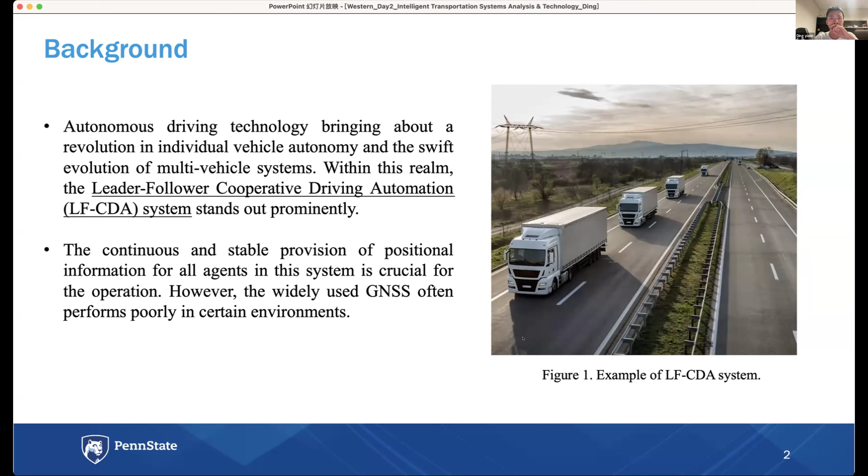I will use the ATMA system to explain what the Leader-Follower cooperative driving automation system is. The ATMA system is used to ensure a safer environment for DOT workers when they do essential tasks like striping. You have two trucks, and the leader truck will handle these tasks, while the follower truck will act as a safe buffer in case an accident happens.

So if you use this system to replace DOT workers, maybe you will decrease accidents happening on the highway or places like this. You get two trucks: the follower truck just follows the leader truck, and the leader truck does these tasks. So that's the ATMA system. In this research, I consider this as a cooperative localization problem within the leader-follower cooperative driving system.

Now I will quickly talk about the literature review. In the current literature, articles on cooperative localization can generally be categorized into two types. One is agent-to-infrastructure based methods. These methods use relative position information exchange between vehicles and a base station along the road to ensure constant communication and data exchange. Basically, you get a base station, and the communication process between the base station and your agent provides each agent within the multi-vehicle system location information.

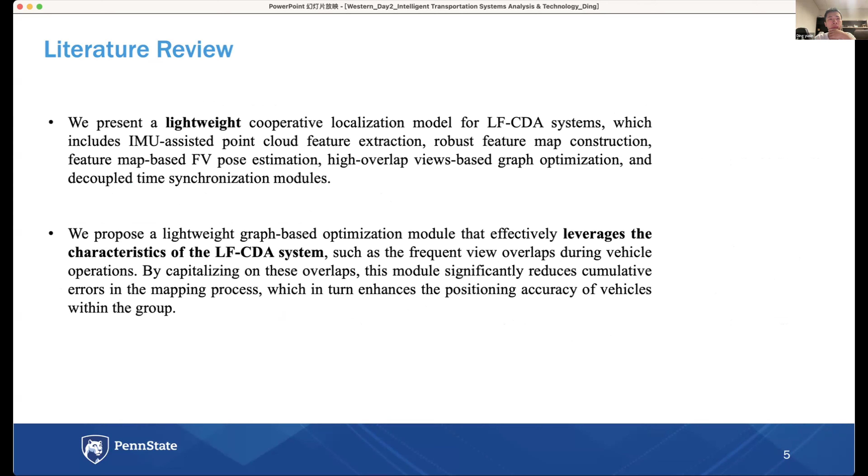So now I will come to the methodology part. We will use the agent-to-agent methods framework to build our own model. And to facilitate the description of each module in this study, we focus just on two vehicles.

So here we just use two vehicles, one leader vehicle and one follower vehicle, to demonstrate our proposed model. Each vehicle will be equipped with LiDAR sensors and IMU sensors, and we will use this sensor data to localize the leader and follower vehicles within the leader-follower system.

Firstly, I will talk about the feature extraction module. This module is used to decrease the size of the LiDAR points cloud, because the LiDAR points cloud is very big, and this will decrease the running speed of our system.

So firstly, I will remove the distortion of the LiDAR points, because when your vehicle keeps running, the LiDAR will have distortion. For example, the LiDAR sends points out at this place, and the vehicle will not stop. Then when you get back these points, the vehicle has gone to another place, which means that the shape of the LiDAR points is not right.

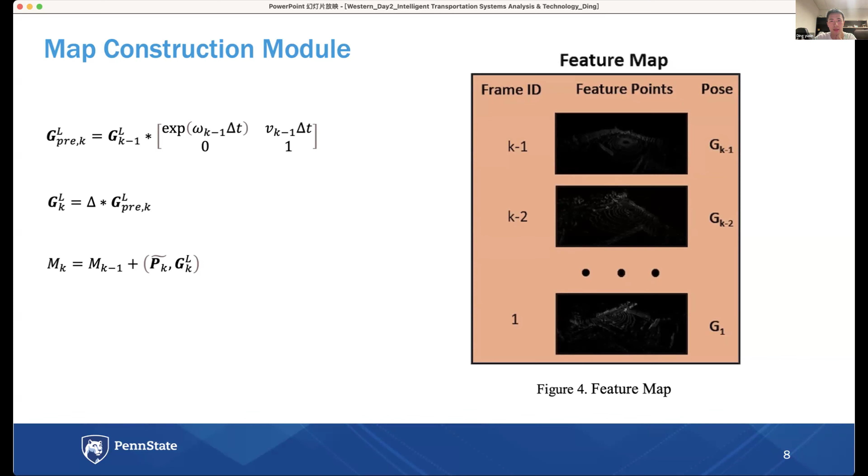And then I will go to the follower vehicle pose estimation, because I've just estimated the leader vehicle's pose, and now I want to estimate the follower vehicle's prior pose. So after using the KISS algorithm, I get the leader vehicle's pose, and then I want to use the NDT algorithm to get the follower vehicle's pose.

While this algorithm requires a lot of computational resources, to reduce this requirement, I use an initial guess for this algorithm.

So we use IMU to estimate the rotation and translation of the follower vehicle. If you want to know how the follower vehicle moves, you have to know the rotation and the translation.

For the rotation, I already get the rotation because when I removed the distortion, I already got the rotation. The R matrix is the rotation of the follower vehicle. And for the translation, I just use the translation of the previous frame as the translation for this frame.

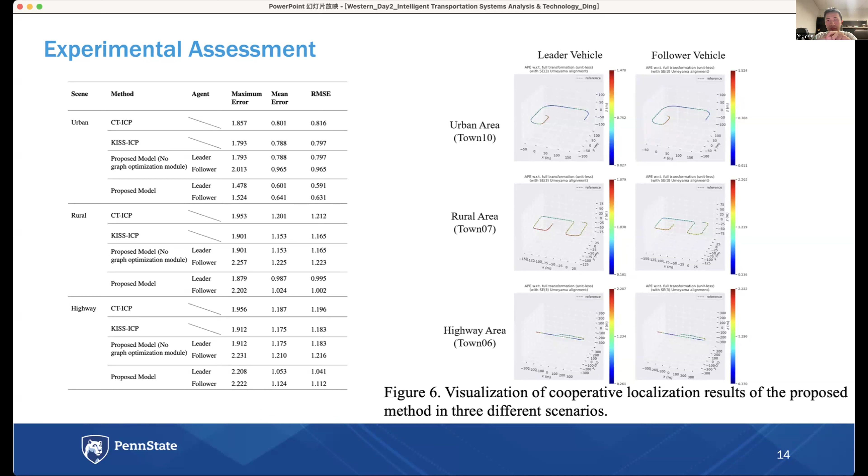The experiments also demonstrated that our algorithm meets the real-time requirements. The whole process, the whole framework of our proposed model, just needs 192 milliseconds, which is less than the frequency of our LiDAR.

So finally, in this research we introduced a cooperative localization model for the Leader-Follower CDA system, designed to provide stable localization in GPS compromised environments. The results show that our algorithm not only reduces the accumulative error but also satisfies the real-time requirements of the system. Thank you, that's all.

Yeah. All right, thank you, Yuxin. Let's see if you have any questions. Well, okay, yeah.

So this, well, I mean, now it looks to me like it's a model. Yeah, it's a model. Have you tested this in any physical environment?

No, not right now, because we need two vehicles, right? A leader vehicle and a follower vehicle. So it's hard for us to find this. We just have one vehicle, so yeah.

Okay, yeah. So yeah, because I think now we have somebody, Lee, you can just turn on your mic to ask.

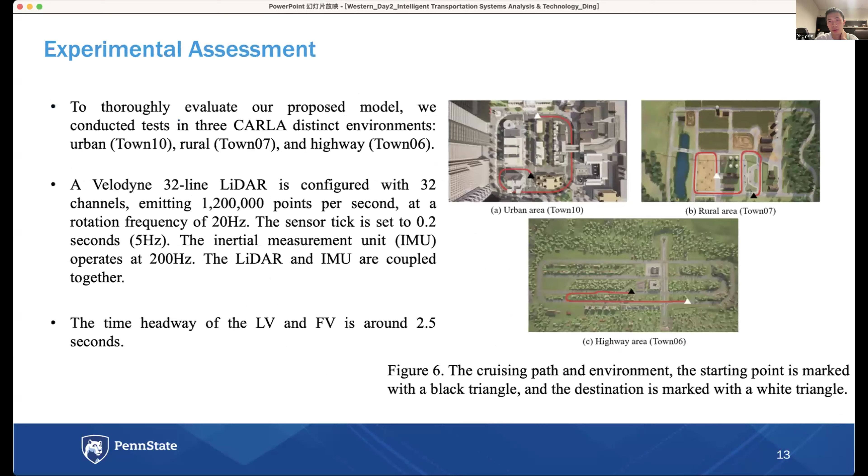So you ask what types of failures may happen, right? Yeah, so I guess building this relationship between a leader and a follower vehicle and building that around your model, in what ways might your model fail, or what kind of extra safety considerations would a company have to think about if they switch to using your approach? And we have a potential failure here.

So we did this research mainly focused on the ATMA system. We want to use our proposed model firstly in the ATMA system. So the thing here is, you can see, if you meet say a traffic light, right? If the leader vehicle just crosses the traffic light while the follower vehicle just meets the red light and stops here, then you will get some problem here, right?

And now, if the travel distance, if the distance between these two vehicles is too long, then you will lose your communication between these two things, and the follower vehicle will just not know where it should go. So following distance would become really critical. Thank you, yeah, thank you.

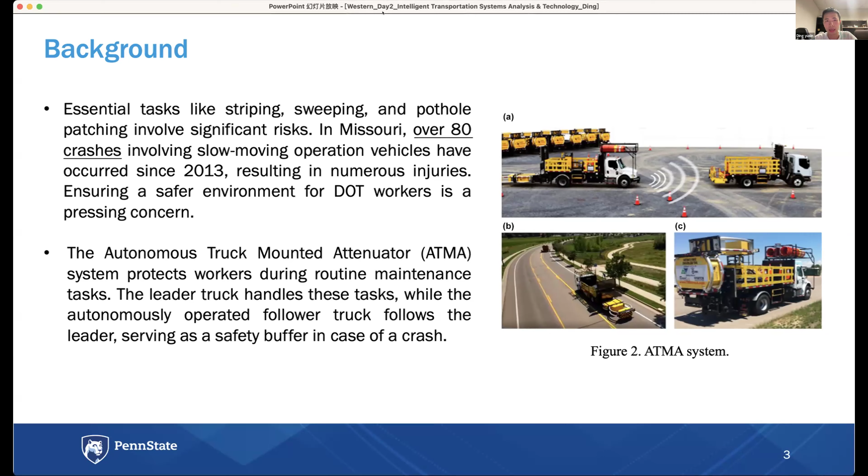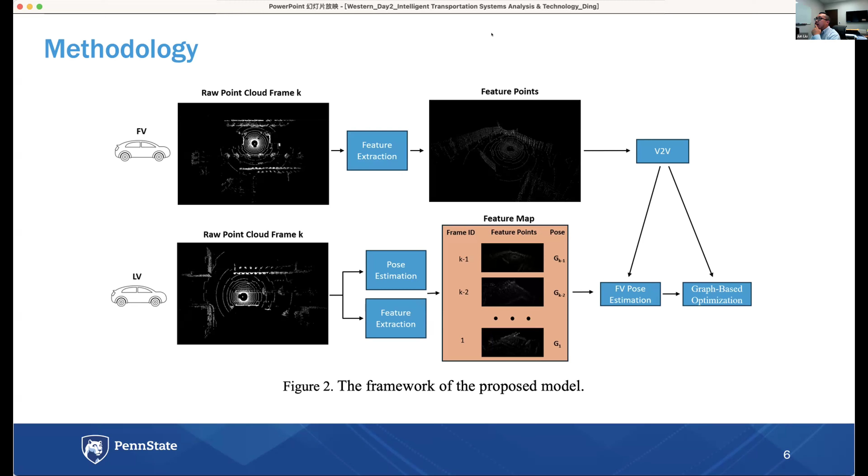So as I just mentioned, for this paper I just used two vehicles to describe our model. But actually, if you want to use this proposed model with one leader vehicle and multi-follower vehicles, that's okay too. Here I just used one follower vehicle. Thank you, Yixin, that is great. Now let's move on to our next talk.

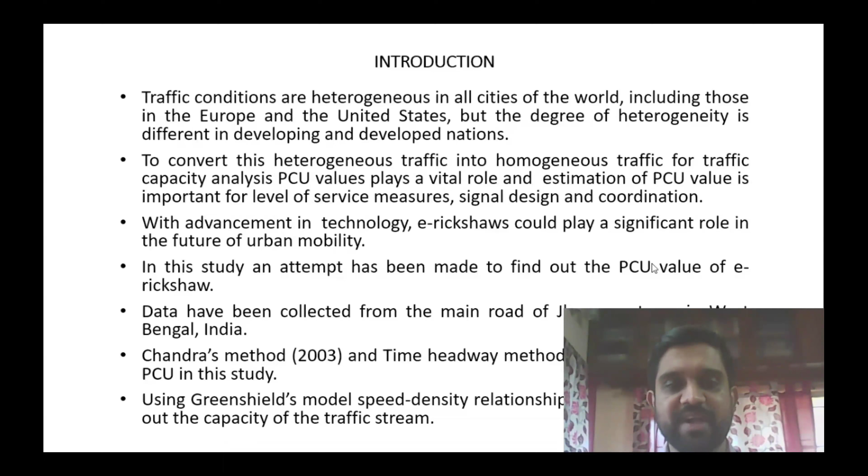There are many methods to determine the PCU value, but here we have used Chandra's method and the time headway method. Greenshield's model has been used to find out the capacity.

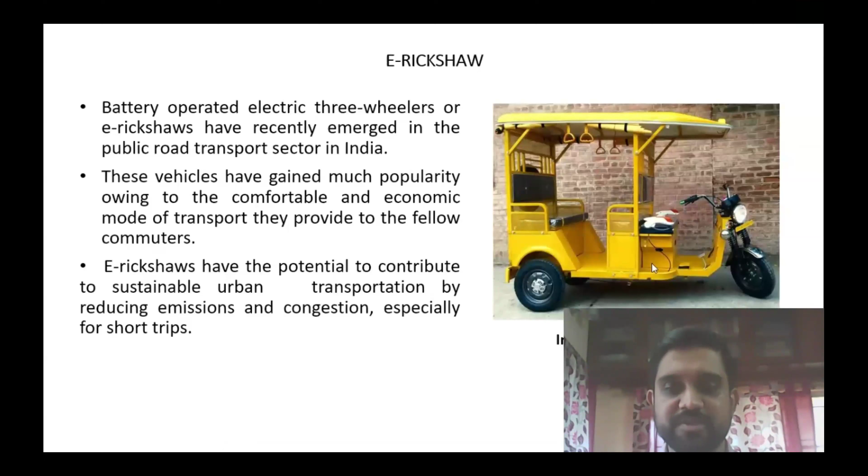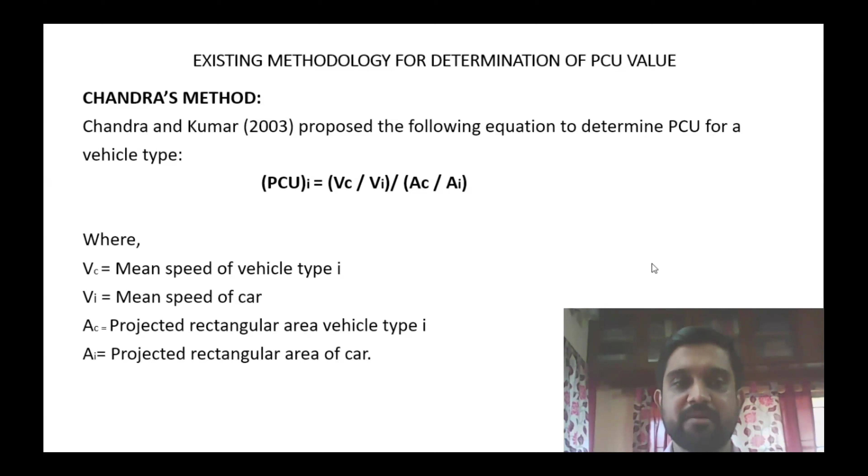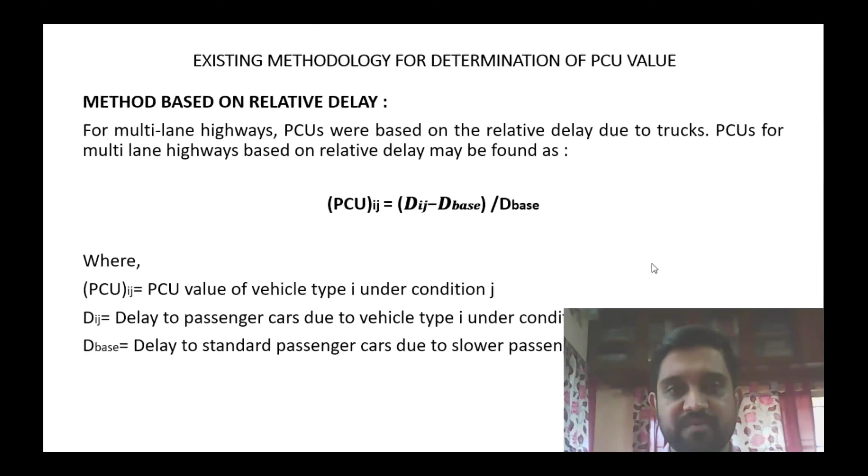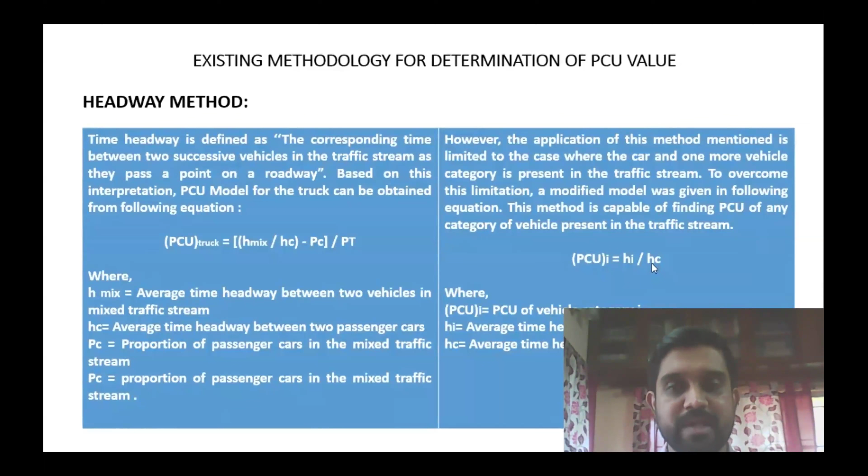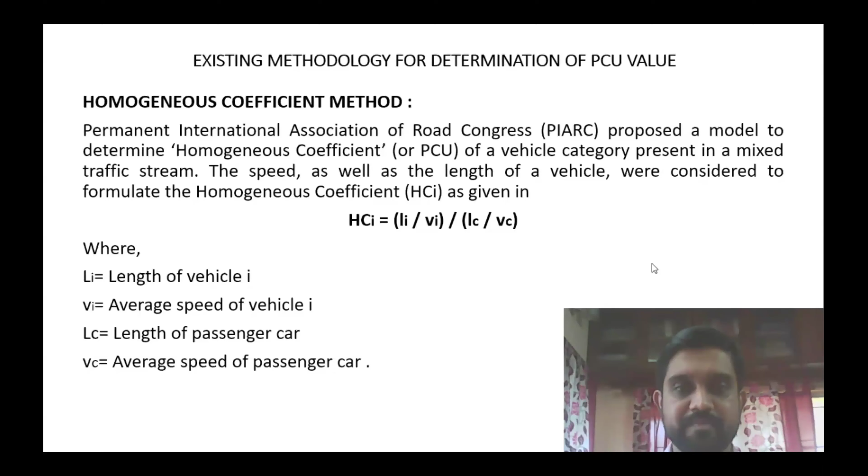The basic considerations while selecting this site were that it should be free from the effect of intersection, bus stop, parked vehicles, curvature, gradient, and any other friction. The section has wide proportions of different categories of vehicles, meaning it has a wide and mixed category of vehicles, and E-Rickshaws have just started operating in the past few years.

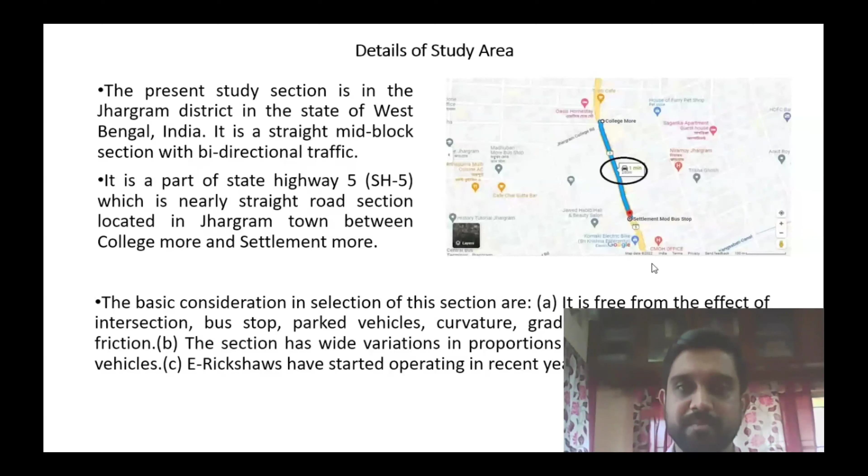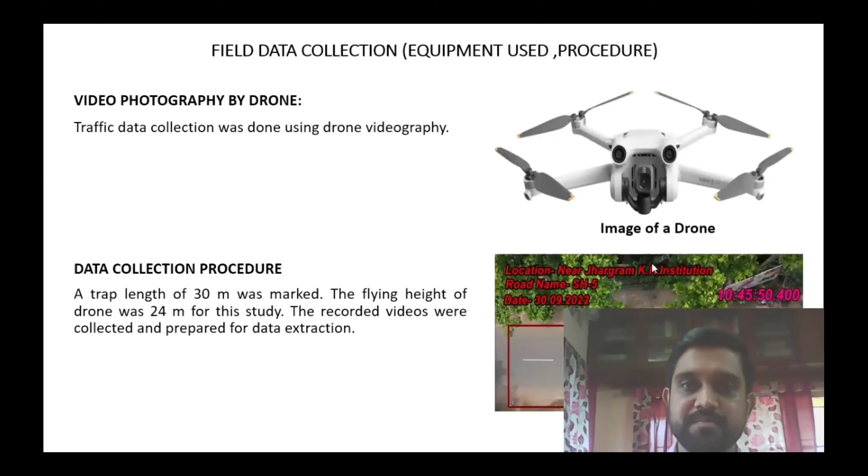Now the video data were extracted manually by playing the recorded video on the computer screen. A screenshot of how we calculated or extracted the data is shown in the following picture.

The aim of the data collection was to get information on traffic volume, vehicle composition, and speed of the vehicle type, along with the roadway geometric characteristics. Data has been extracted for 1 minute interval and 5 minute interval. The extracted data are classified into traffic volume, traffic composition, space mean speed, and time headway.

Now, in all these tables that we have extracted, in this classified traffic volume, I have given a table of classified traffic volume for 1 minute interval from Settlement More to College More. I have given a sample. I could not provide the whole data or whole table because there is a huge amount of data extracted here.

Traffic volume refers to the categorization and analysis of vehicular traffic based on different classes or types of vehicles such as car, trucks, etc. All the vehicles in the traffic stream on the selected study area were categorized as car, big car, e-rickshaw, motorized two-wheeler, bicycle, cycle rickshaw, motorized three-wheeler, light commercial vehicle, and bus.

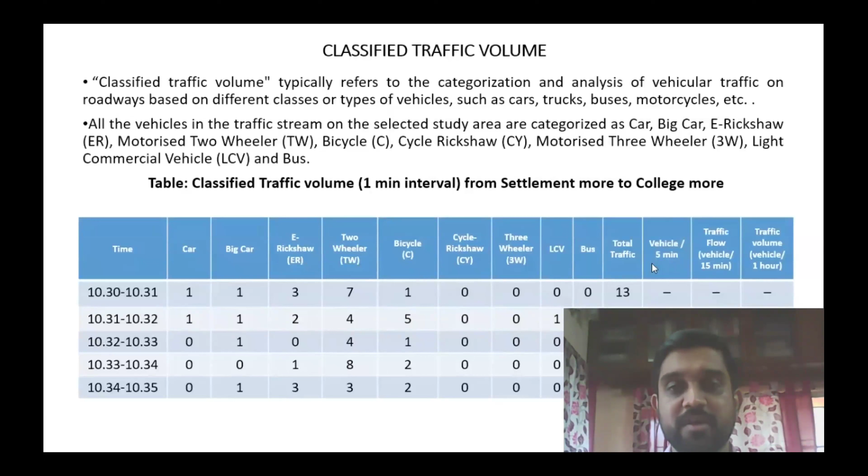On the left-hand side, in the time column, we have 10:30 to 10:31, meaning we have taken data for a 1 minute interval. These are the traffic volume counts for a sample data for 1 minute interval from Settlement More to College More.

Now I have provided a traffic composition which shows on the left hand side the number of vehicles and the percentage of vehicles occupying the road from Settlement More to College More.

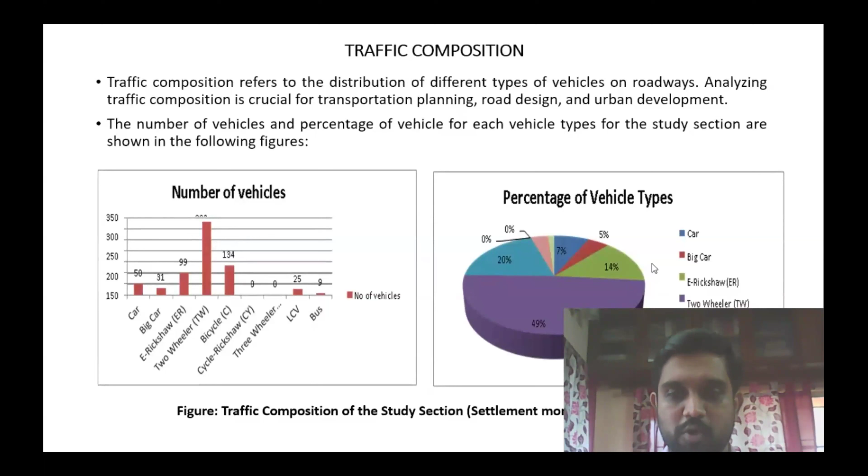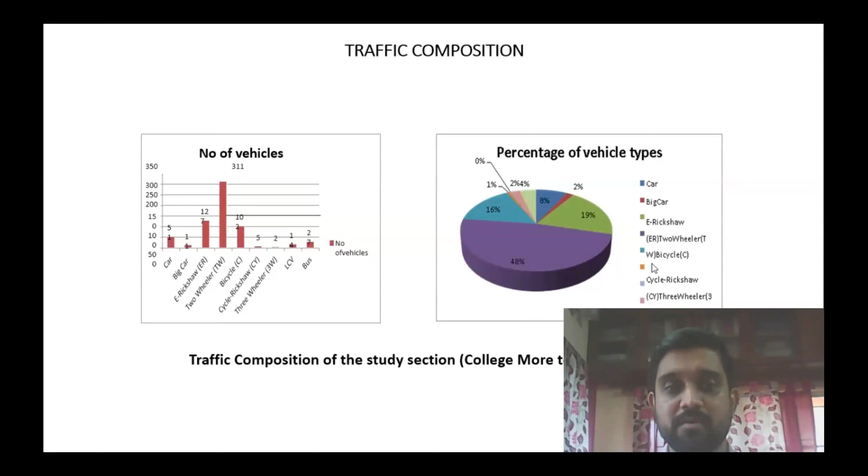On my previous slide, I showed the traffic composition of the study section from Settlement More to College More. Now I am showing the traffic composition from College More to Settlement More. On the left hand side, we have the number of vehicles, and on the right hand side, I have shown the percentage of vehicle types occupying the road from College More to Settlement More.

The speed of each individual vehicle has been calculated by taking its entry and exit times from the trap length, which is the time needed for it to travel the 30-meter length. The space mean speed of each class of vehicle has been calculated by dividing the trap length by the amount of time needed to cross the segment.

Here also, I have given a sample data of the space mean speed, represented in km/h, of the study section from the Settlement More to the College More.

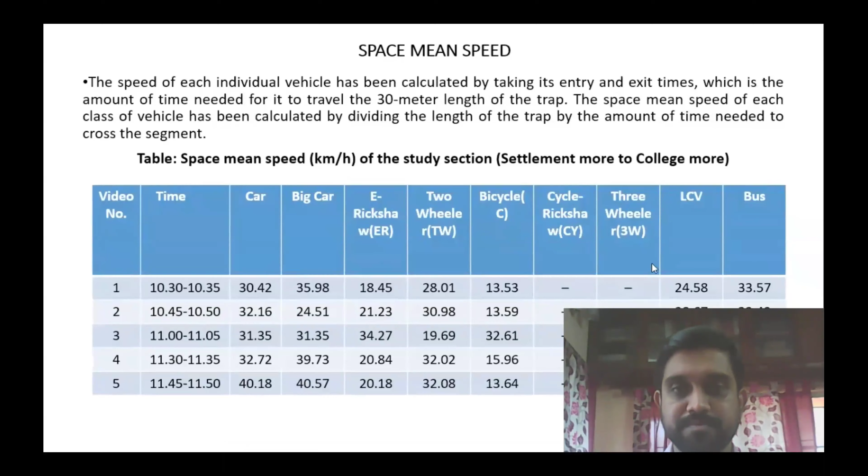Next is time headway. Time headway refers to the time interval between two consecutive vehicles as they travel along a road. A shorter time headway indicates vehicles which are closely spaced, which can lead to higher traffic density and potentially contribute to congestion. Conversely, a longer time headway allows for more space between vehicles.

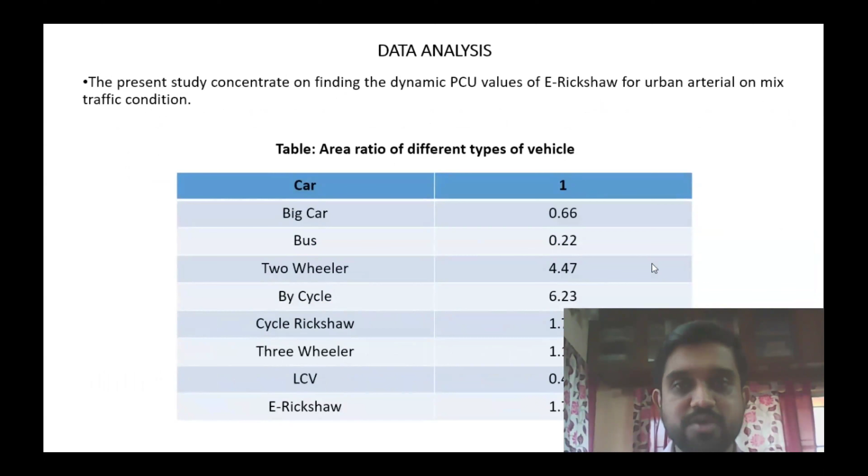So coming to the data analysis, in the Chandra's model, we found that the area of different types of vehicle were needed. So the present table shows the area ratio of different types of vehicle.

Now it's time to find out the dynamic PCU values. Here we have considered the passenger car as the standard vehicle. In the PCU values obtained by Chandra's method from Settlement More to College More, the time interval we have taken is of 5 minutes, and the car we have taken as standard vehicle, hence all its values are 1. Then by Chandra's method, we have calculated the PCU values of the different types of vehicles.

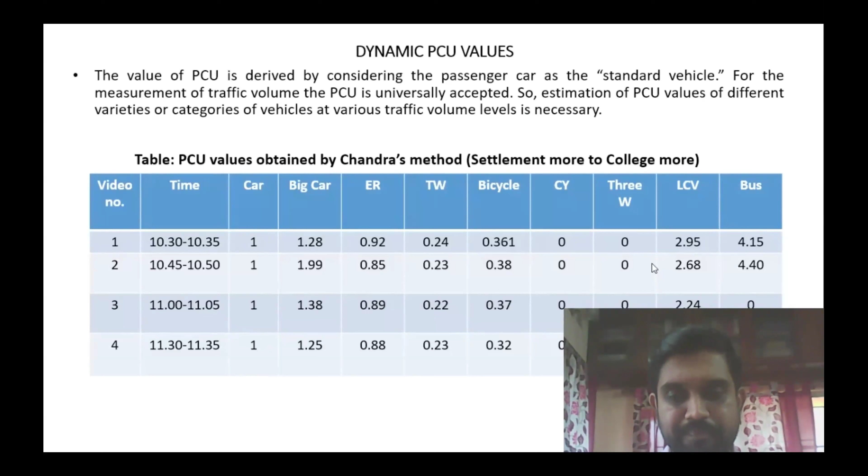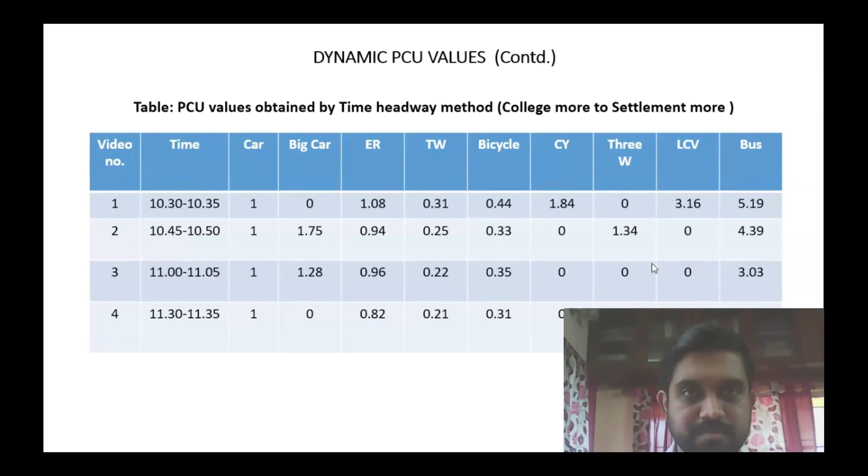The previous slide showed the PCU values of different types of vehicle using Chandra's method, and the following table in this slide shows the PCU values of different types of vehicles by time headway method. Here also, I have made prominent the part of E-Rickshaw, which shows the PCU values of E-Rickshaw from College More to Settlement More and Settlement More to College More.

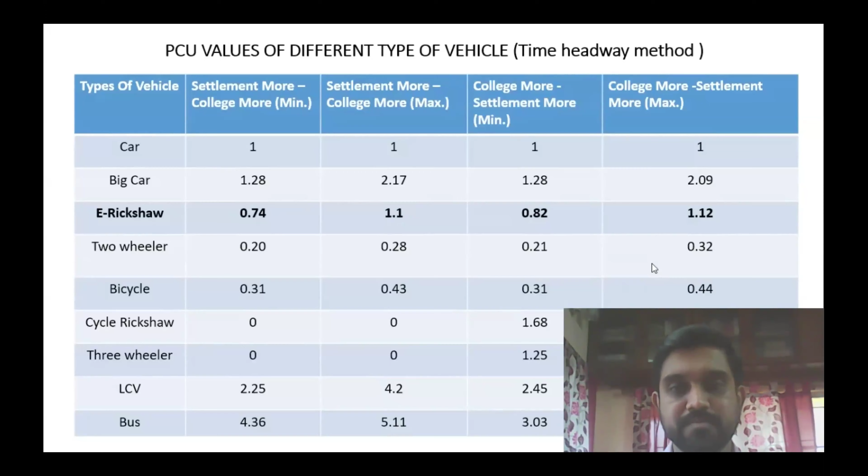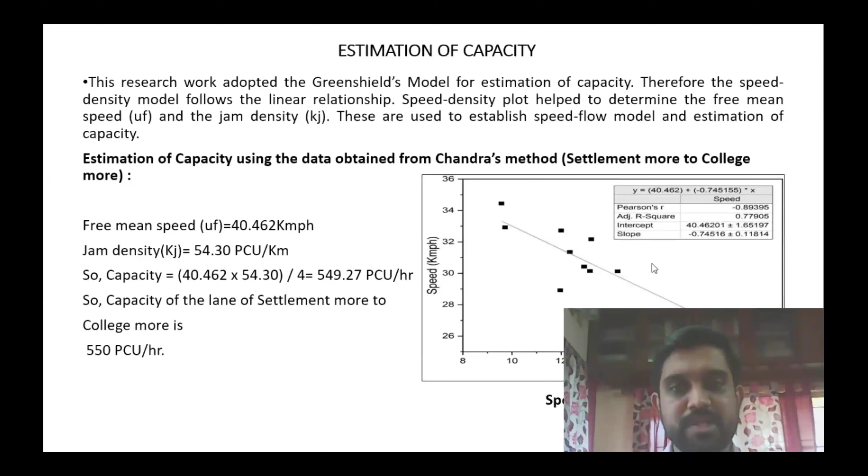So this shows the vertical curve of speed-density for Settlement More to College More from the data that we have received by Chandra's method of calculation.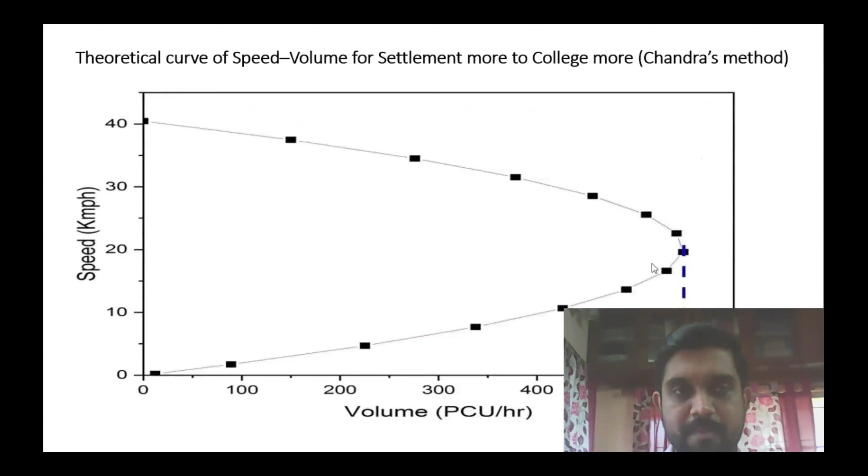Estimation of capacity from College More to Settlement More. Here I've shown the theoretical curve of speed volume from College More to Settlement More, from the data extracted by Chandra's method and the speed density relationship, from where we get an estimated capacity of 573 PCU per hour from College More to Settlement More.

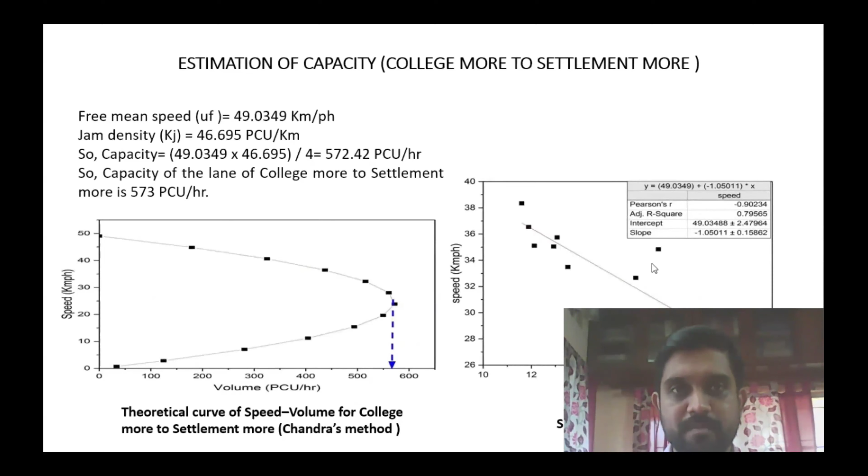In the last two slides, I showed you the estimation of capacity using data from Chandra's method. Now in this slide and the next, I will show the estimation of capacity from Settlement More to College More and College More to Settlement More using data from the time headway method calculation.

Here I've shown the theoretical curve of speed volume and the speed density relationship, from where we got the capacity from Settlement More to College More as 539 PCU per hour. Please remember, this is from the data extracted using the time headway method.

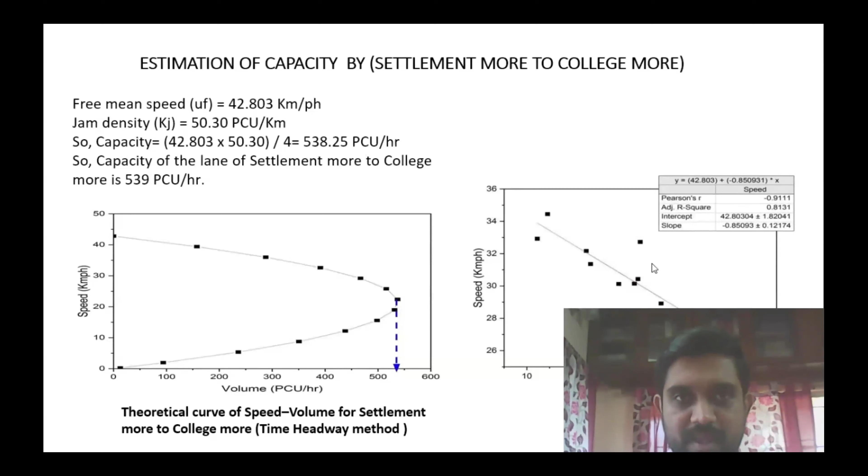Now the estimation of capacity from College More to Settlement More using the data from the time headway method. Here the speed volume relation and speed density relationship is shown, and from the free mean speed and jam density, the capacity was calculated as 592, which we have taken as a whole as 593 PCU per hour.

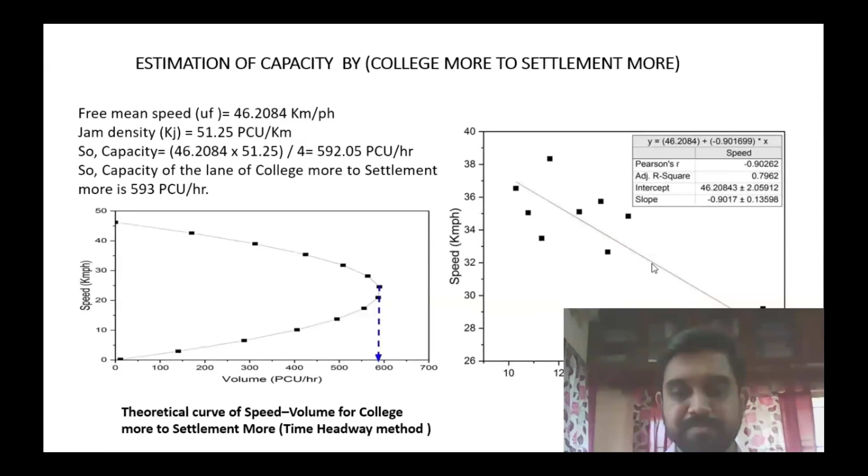In the conclusion part, it has been observed that the PCU value of E-Rickshaw was varying from 0.78 to 1.15 when using Chandra's method, but the PCU value varied between 0.77 and 1.12 while using the time headway method.

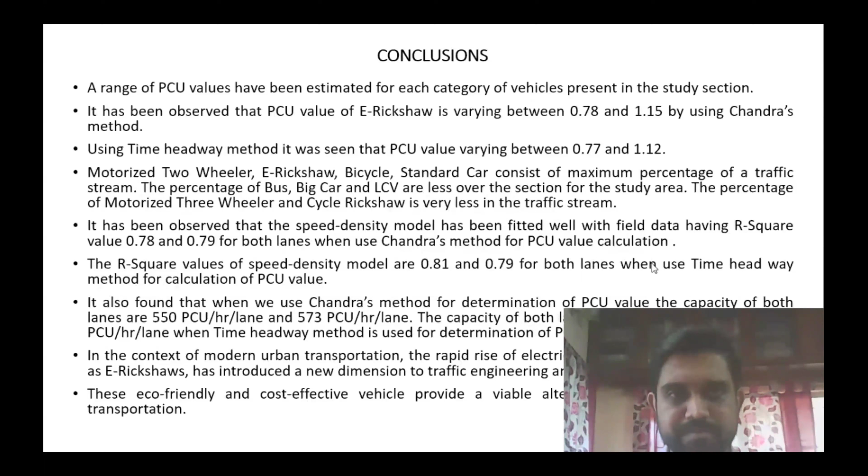Now, what are the scope of the future work?

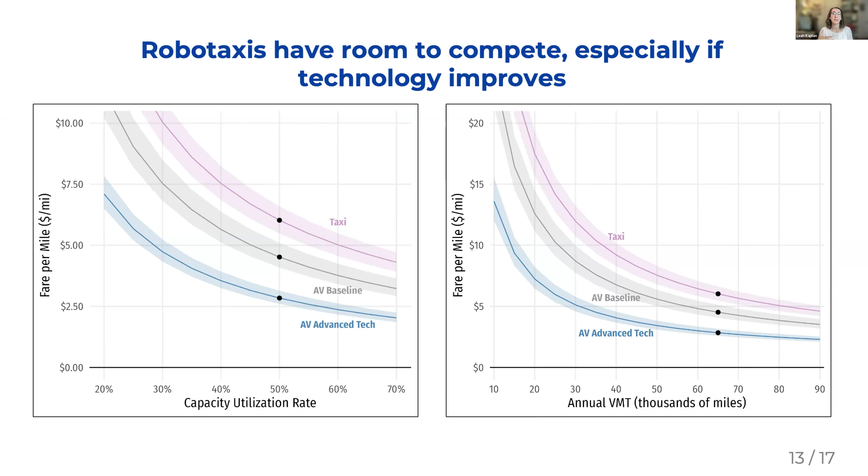Robotaxi firms really need to think about this balance - trying to decrease costs and labor costs against still having safe and high quality services.

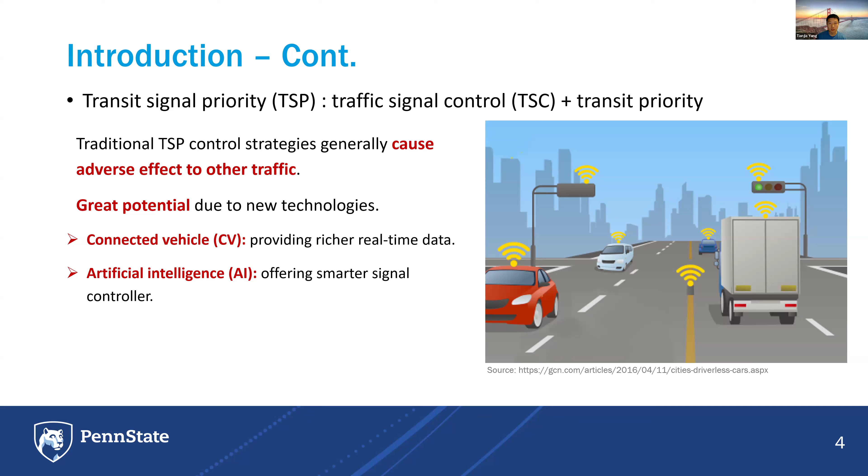But with new technologies, the transit signal priority research has great potential to progress. For example, if we use connected vehicle technology, we can obtain real-time data of the vehicles traveling on the road. And if we use rapid advancement AI technology, we may develop a smarter signal controller.

So my research tries to propose a smart traffic signal controller. First, we leverage real-time traffic data that is available in the connected vehicle environment. Second, we adopt AI technology, named deep reinforcement learning approach, to optimize the signal phasing and timing. For the deep reinforcement learning, we designed a person-based reward function, and by using this reward function, we can ensure traffic performance based on passengers rather than vehicles. In this way, we can ensure that vehicles with more passengers can be granted priority compared to those vehicles with only one passenger.

In my research area, the environment is the traffic environment, including the vehicles traveling on the road, and also we have to consider the traffic configurations of the intersection.

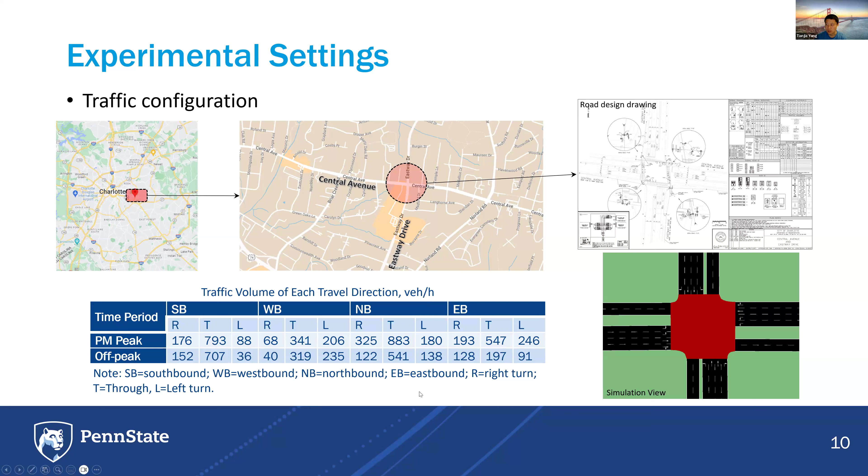For the experiment, we used a 4-leg intersection located in the east of Charlotte, and we used SUMO to build this simulation test bed. We also obtained the real-world traffic volumes from Charlotte DOT, and we considered 2 different traffic demands: one is peak hour traffic demand, and one is off-peak traffic demand. We noticed that the traffic demand is not balanced across different turning movements.

To evaluate the proposed controller, we also built 4 different environments, each corresponding to a traffic controller. The first environment is...

...a pre-timed signal control environment, and in this environment we use a controller with pre-timed signal control logic. We use a 4-phase program, and the signal timings are calculated based on the Webster method. In this environment, the buses and the cars are assumed to be human-driven vehicles.

In the second environment, we use an actuated signal controller to control the signal timing and phase. The ring and barrier phase program is used, and also the bus and the cars are human-driven vehicles.

And in the third environment, we consider that the buses are connected vehicles, but the controller is still actuated signal control.

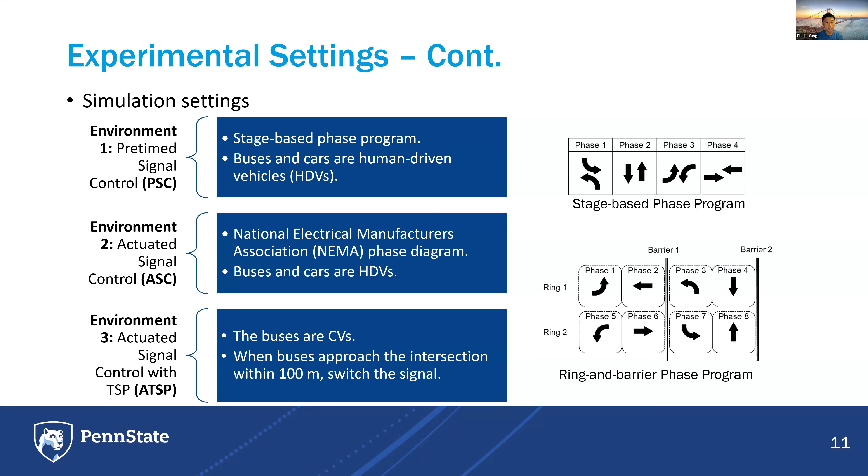But when the bus is approaching the intersection within a predefined distance—in our environment, we set it to 100 meters—the controller will switch the signal to provide unconditional priority to the buses. So the last environment is our DQN signal control environment.

In this environment, we use the well-trained DQN controller to control the signal phase and timing. And for the DQN, we use a convolutional neural network to process the input, because the input is an image-like representation.

Other basic settings are: we simulate 1 hour with a 10 minute warm up, and the performance metrics are averaged over 50 rounds with different simulation seeds. For the basic scenario, the passenger occupancy is 30 passengers for bus and 1 passenger for cars. Bus arrival headway is 5 minutes, and the bus only travels in the north-south direction. We trained 2 different agents for 2 different traffic demands.

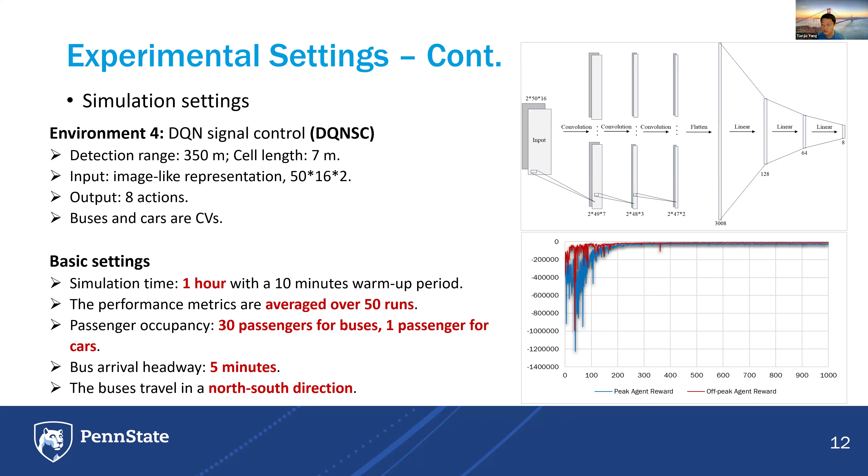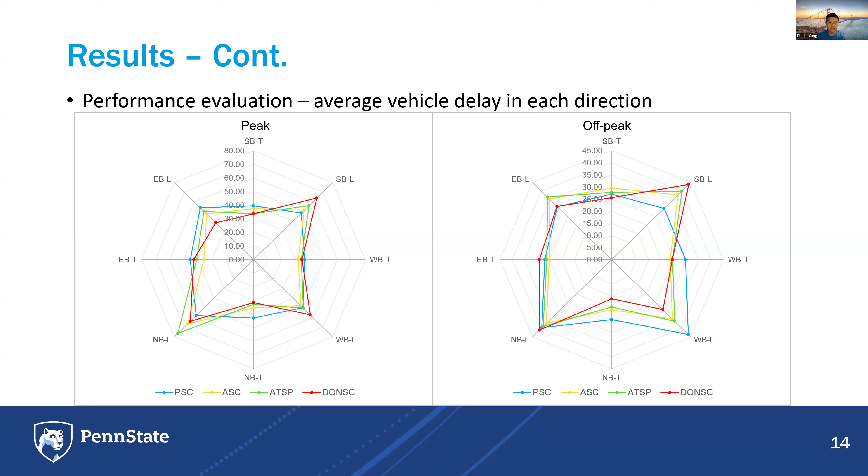We look deeper and compared the average vehicle delay in different turning movements. The result shows that for controllers not considering transit signal priority, they provide much more balanced performance across each direction. But if we introduce the transit signal priority strategy, some turning movements such as the northbound left turn or southbound left turn may be sacrificed. So this may be our future working direction—to provide more balanced service while ensuring transit signal priority.

We also did some sensitivity analysis, considering the connected vehicle market penetration rate, the passenger occupancy, and the arrival headway. As we can imagine, when the connected vehicle market penetration rate increases, the performance in terms of both average vehicle delay and average person delay increases. We can notice that the turning point in our experiment is when the connected vehicle market penetration rate reaches 40%, the performance of our controller can achieve a decent level.

In terms of passenger occupancy, we can notice that as the passenger occupancy of the buses increases, the average bus delay, shown by the blue line, decreases significantly, which showcases that our proposed controller can provide priority based on the passenger occupancy. Regarding the arrival headway, our controller is insensitive to this factor.

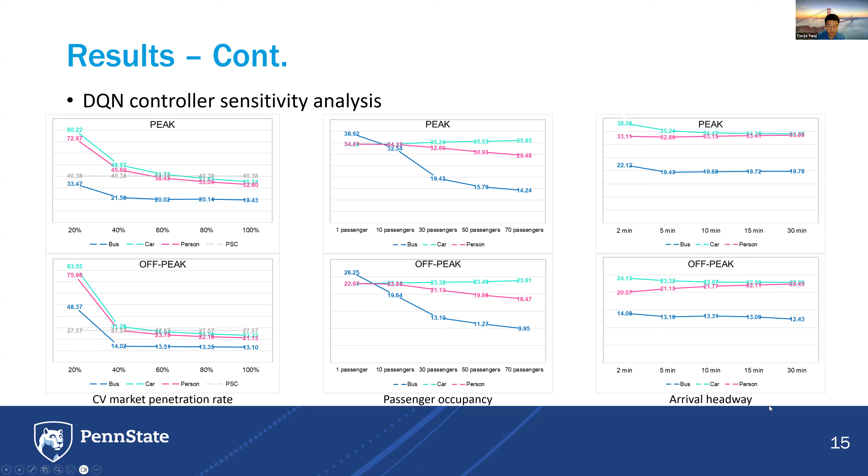The results demonstrate that applying deep reinforcement learning in traffic signal control to provide priority is a promising research direction, but it's still in the early stage. So for the future, we try to list several research directions.

First, we consider implementing multi-agent reinforcement learning to control multi-intersection scenarios such as corridors or network-wide. We also try to address transit operation challenges such as bus bunching problems, which is a real-world transit operation problem. And we can consider more complex traffic conditions.

In this research, we only consider that buses travel southbound and northbound. But in the real world, there are scenarios that the traffic controller may come across where there's simultaneous traffic priority requests from perpendicular directions. So how to deal with that is also a problem.